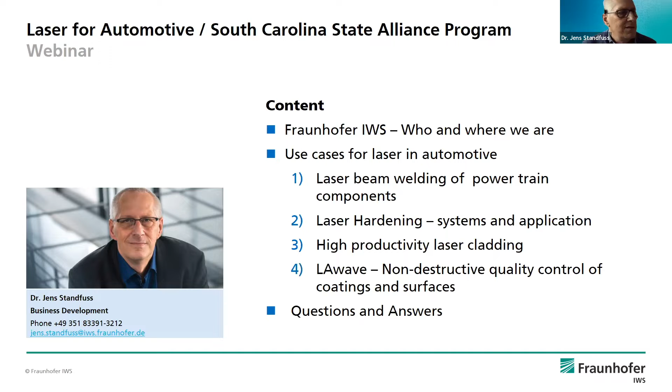I think you are familiar with Fraunhofer from the previous webinars. A short introduction to the Fraunhofer Institute for Material and Beam Technology: we are approximately 225 people of permanent staff, and we also have guest researchers, especially PhD students.

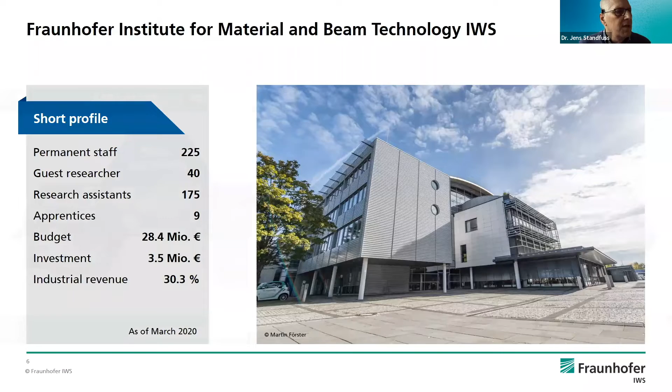We have a budget of around 30 million, and industrial revenue, especially last year, which was a very hard year, I think, for everybody working in industrial research, dropped a little to 30%. Normally we are in the range of 40%. Industrial revenue means direct contract research with companies from Germany, but also from Europe or from the US.

We are working with laser technology in two main topics. One is laser materials processing, from cutting, ablation, microtechnology, joining, and I will give some examples, and thermal surface technology, from hardening to coating technology. But we also use lasers for hot topics like additive manufacturing and printing, and also for chemical surface technology and PVD, which I don't want to touch here.

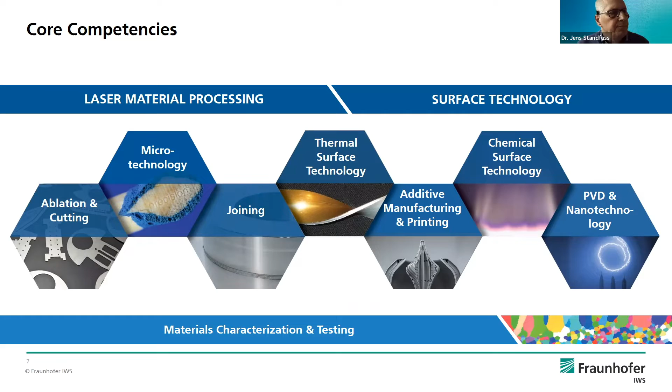From our history, we come with a very deep understanding of material behavior. This is our background, and we connect it with processing technology from laser materials processing. I think we are well connected in Europe and also in the US. In Germany, there are two centers: nearby here in Zwickau, at the university, there's a Center for Optical Metrology and Surface Technologies. And for many years, especially in coating technology, we have had a center in Dortmund together with the steel producer ThyssenKrupp Steel, working on PVD and ceramic coating technology, especially for steels.

In the east, we have a connection to Wrocław, Poland, where we have a project center too. But the oldest one, I think, is in the US: one is in Plymouth, the Center for Laser Applications, CLA, and also, I see Thomas here, a member at the CCD in Lansing. Since the beginning in the 1990s, there has been a connection to these centers, where we have a very good connection and history with the people and the technologies.

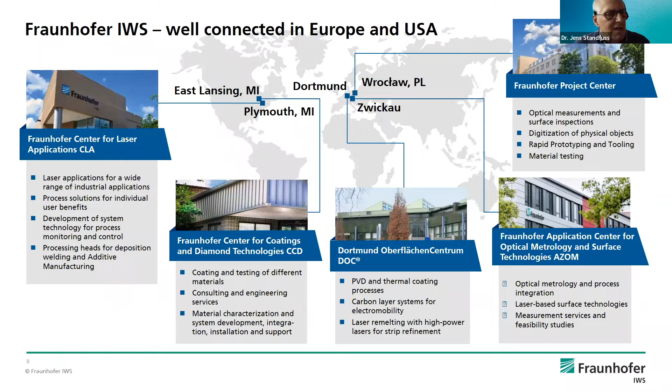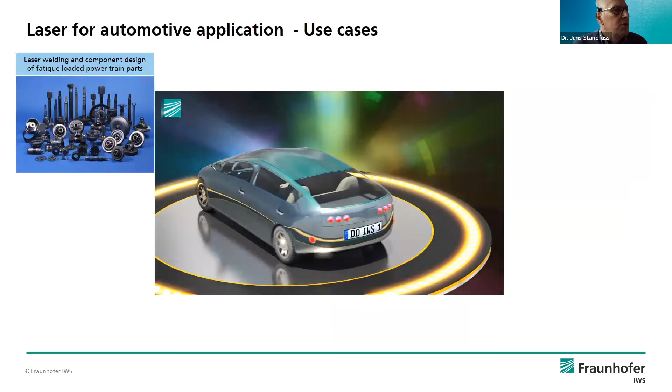What are the use cases I want to present and talk about with you? One is a very old story: laser welding, especially for high fatigue loaded powertrain. The second one is using lasers for hardening in mass production. I will give you some information on the process, the systems and possible applications. The other part of the surface topic is laser cladding, with an example for brake discs, like I told you in the beginning, especially for electromobility, where some new requests are coming from.

And last but not least, connected to this, if I coat something, I must also have a tool to characterize the coatings and the surface. I will give you some information showing our developments and systems for laser acoustic surface testing. That should be the storyline for the next 20 minutes, and hopefully I can give you some interesting information about our developments.

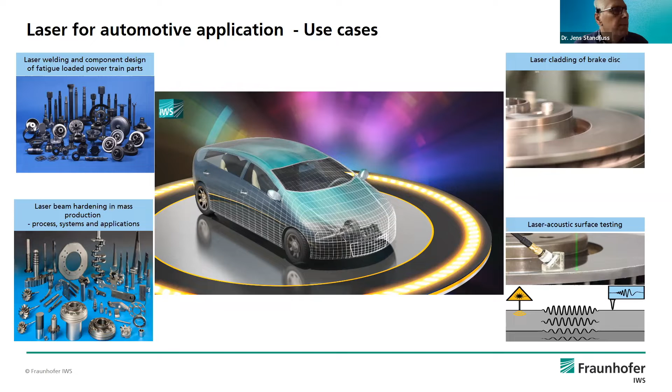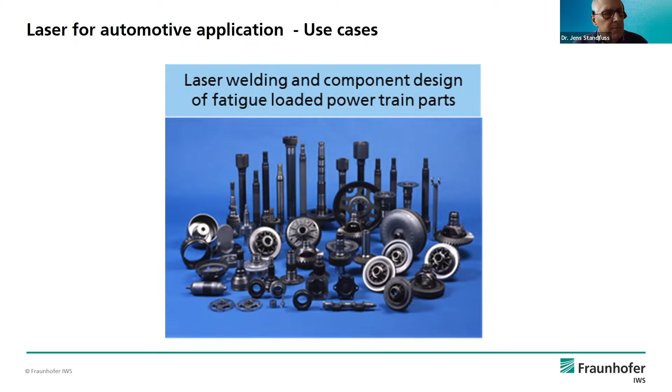First topic: laser welding and component design for high fatigue loaded parts, especially in the automotive drivetrain. What is the challenge? I think the market situation for powertrain components in recent years has been very hard. There is a rising number of drivetrain components. We speak about transmissions with 7, 8 or 10 speeds, very complex parts. But we now also have electromobility with its components, hybrid drives, and differentials and axles.

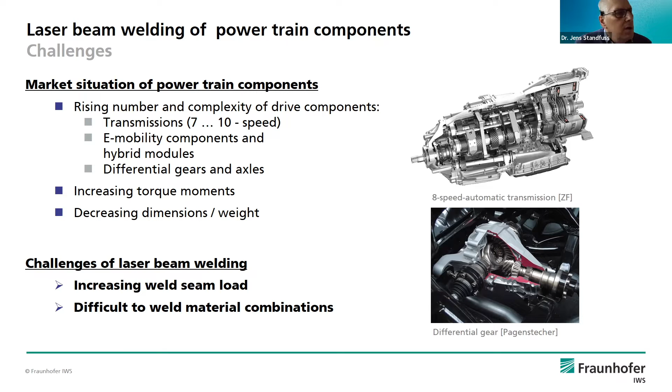What is common to all of these applications is increasing performance, especially with the development of high power motors and electromobility. Lightweighting means decreasing dimensions and weight, and one solution to this problem is laser welding. But we have some challenges: with higher torque, we have increasing weld seam loads, and we need high-strength materials, which are more difficult to weld. In the next minutes, I will give you some information on how we try to solve this problem, our procedure, and what we can offer you.

I will make an example to show and explain this in more detail. For example, for differential welding, I think this part we need for all kinds of cars, whether we speak about normal combustion engines or electromobility. All of this will have a differential here.

In the past it's not welded, it's fixed by screws, and we need a very long thick flange. We need these holes and rings for the screws, and we have 8 to 16 screws to fix the housing with the crown wheel. Since many years, laser welding comes more and more into this because it's faster and we can save weight. We don't need the flange, we don't need the screws, and this saves money and weight. This is the driving force to speak about laser welding for differential gears.

But there is a challenge from the material side. We have a crown wheel case-hardened steel and the cast iron housing. From the weldability, we have some challenges with the high carbon content of both materials, so we have extremely high hardening inside the seam, and we have a risk for cold cracks. So we must have some technology proven with respect to the material and the parts themselves.

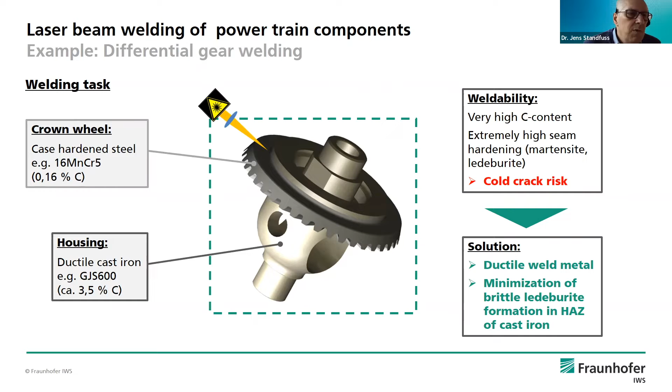And the solution as well is from the beginning, from the welding side: if we have hard-to-weld materials and high strength materials, if the weld is ductile, we have a chance to weld it without cracks. It needs, in more detail, to minimize the so-called brittle ledeburite formation in the heat affected zone of the cast iron, and so we get perfect welds with this.

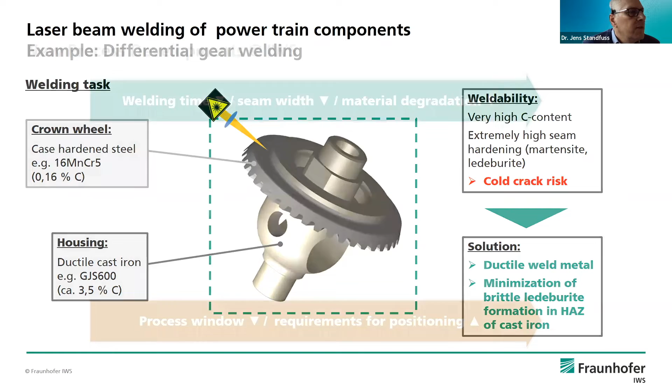But anyway, requests are sent. Welding machines are flexible, and you can use them for different types of parts. So anyway, the question from the customer is to reduce welding time, reduce the weld seam size with respect to this portion, reduce the material degradation to have a high performance part, and have a good process window. But all these requirements above are a little bit counterproductive to the process window and the requirement, especially precision. What is the history?

The history: we started this development more than 20 years ago using classical CO2 laser and filler wire, and started production here for a German company, ZF. I think they are also in the US. This first application, where we are talking and where we have these slides, is a differential from Mercedes-Benz for the M-Class, produced in Tuscaloosa, and this was the first application of this, starting with CO2 laser and filler wire.

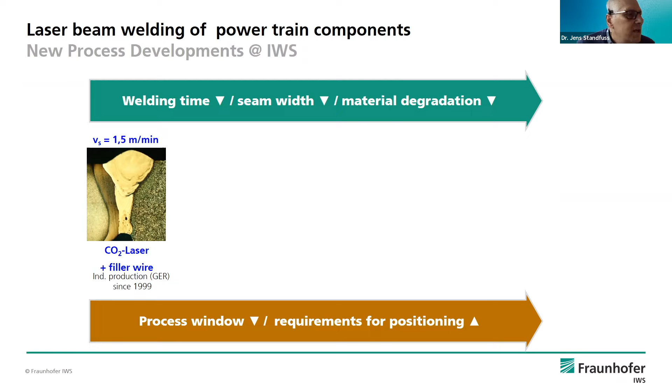Filler wire means a nickel-based filler wire, and it's very tricky to have a deep weld seam and a homogeneous distribution of the filler material. So there was some development to use a foil instead, which has the advantage that you can increase the welding speed, so the processing time drops down.

But this was the question from the customers: why do we need this filler wire? When we speak about nickel, we have a price of nickel around 80 to 120 euros per kilogram for this filler material. This means per weld, per part, we speak about 30 to 40 euro cents only for filler material. And if we have some hundred or thousand parts, then it's a high amount of cost for filler wire, so we want to speed up the welding speed to reduce the processing time.

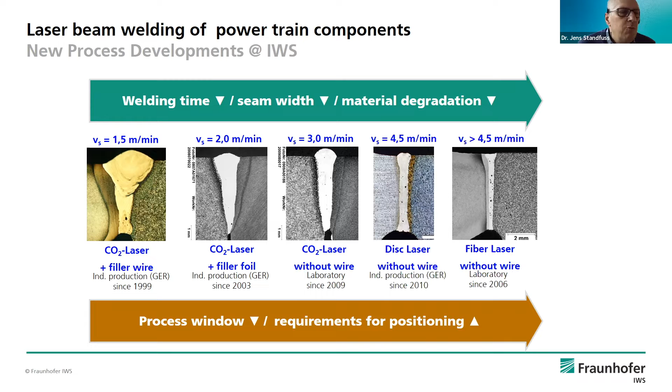That's why with new lasers we have this chance, and we can speed up the welding speed by a factor of 3 with this. But the welding speed is one side. You have some requests to the product quality and how you can handle this.

Our procedure is that we get a closed loop solution. Not only the process, but we also give the design values to design the part and the weld, and you have both connected with the process. This means we can offer a special FEM solution to adjust the weld seam to the stress situation.

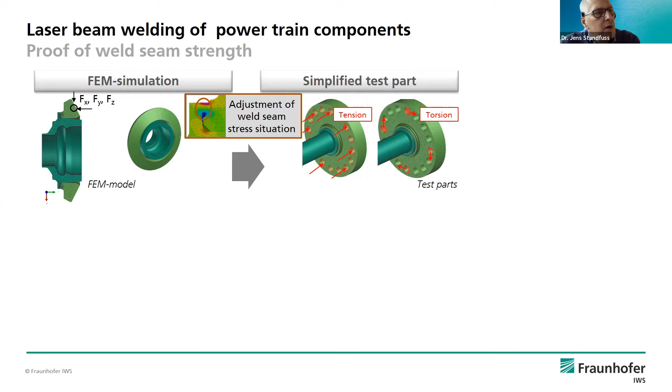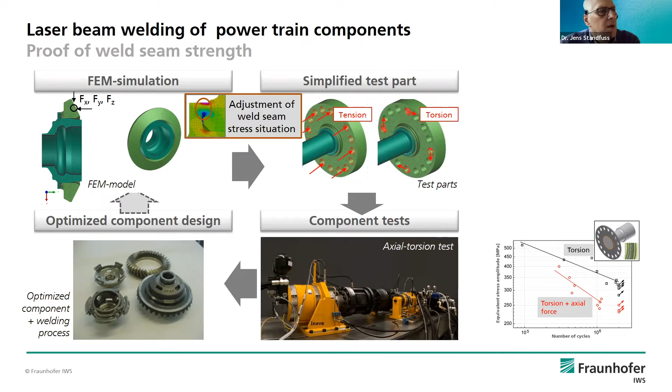But there are no dimensioning values for this special material combination, so you need tests to get design values for the weld seam themselves. It's a complex loading, you have tension, you have torsion, and we can do this by simplifying test parts, but with the request that we have the stress situation according to the real part. We can test this by axial and torsional loading and get S-N curves for the dimensioning, and then we can optimize the component design also with the knowledge of the process itself. And at the end of the day, what is the advantage?

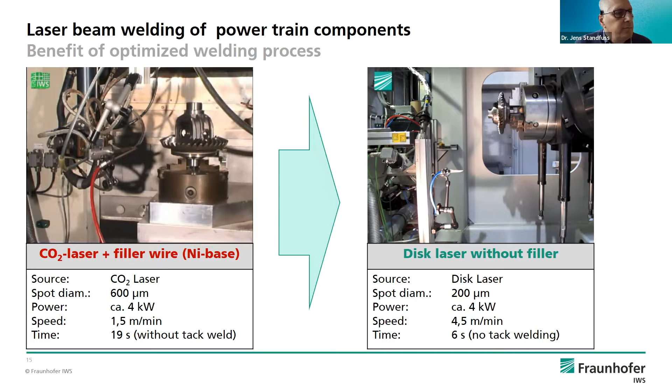Offering this means we have the complete process development, process chain, together with some customers or producers from equipment. At the end of the day, there's a collection of parts which come here to our labs, to our development center, for these powertrain components. We don't only weld some coupons for test parts, so we can offer you the complete process chain, beginning with some basic trials up to real components.

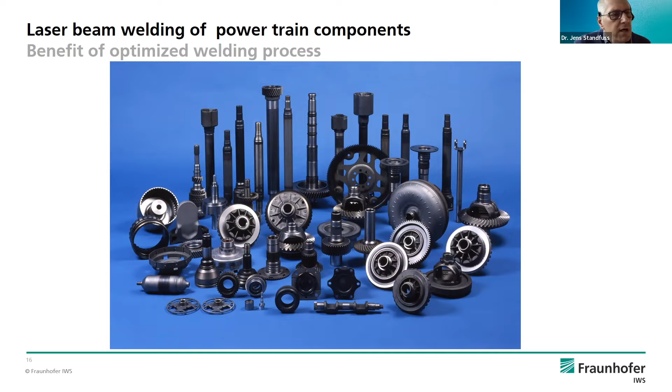This is the first application: laser beam hardening. What is the challenge generated for hardening? Conventional hardening technology using furnaces, induction, or flame hardening is time and energy consuming.

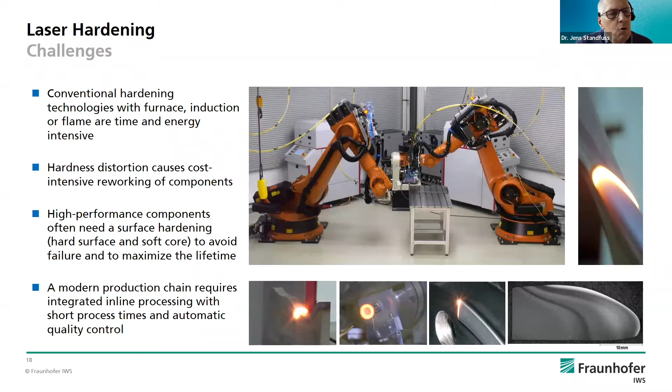The distortion is directly connected to the energy you put into the part. That's why laser hardening offers a good solution, because you can minimize the heat input and integrate it quite easily in existing process lines. It's quite fast, with short process time, and you can also get automatic quality control.

What it means - let me show some slides here. Hardening depth for laser hardening is normally up to 1.5 millimeters, and I think this hardening depth covers a wide range of applications for gears, stamping parts, tools, and so on.

The advantage compared, for instance, to induction hardening is that you need no liquid or gas as quenching media. You use self-quenching from the part, of course minimizing heat input only on the surface. So you get the maximum hardness - shown here for tool steels, up to maximum hardness over 800 Vickers hardness, approximately 62 to 63 Rockwell. You have a very efficient process because the absorption on the part is quite high.

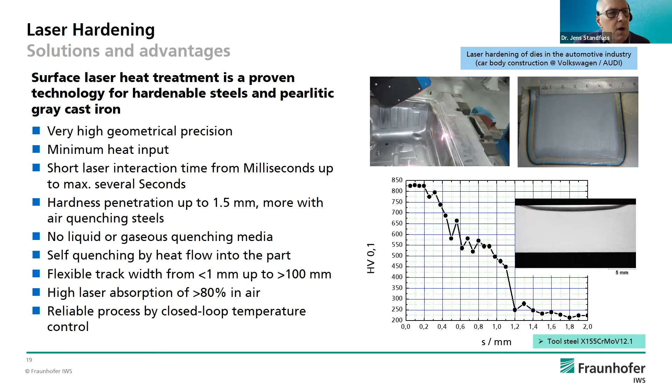It's a very good process, but what you need are systems to control this, to integrate, and to be flexible, using the flexibility of such a process. What you need is two things: a beam forming system to shape the laser beam and adapt it to the part, and you must control the temperature and heat input depending on the geometry and heat conduction of the part.

Both of these can be offered. There are developments of real-time measurement sensors to control the process parameters, and this is connected to a beam forming system to adapt the beam.

Shown here in the part, you see a quite wide range of geometry change, and the process runs automatically. You have up to a 60 millimeter wide track for hardening, adapting the process parameters by scanning laser power and also the scanner parameters automatically to the surface composition - without programming. You only program, based on some experience and values, the hardening depth to the material, and the geometry changes are controlled automatically.

This covers a very wide range of geometry, so it's a very flexible tool - the beam forming unit along with the temperature control system - to harden complex shapes. This is very flexible.

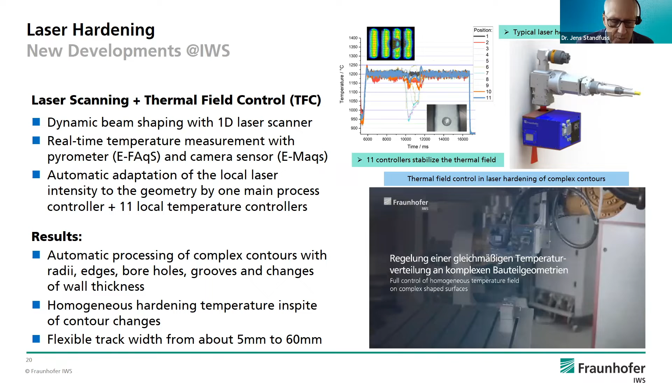Some examples: turbocharger shafts as a running example because there are different kinds of shafts in different diameters. We substitute classical induction hardening because for each geometry you'd need a coil and a tool, whereas with laser it's just software connecting to the part, and you can save money. Rails, bearings, balls - there are different kinds of applications for laser hardening.

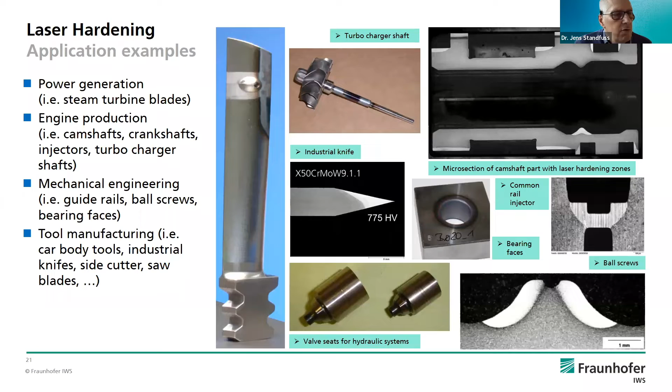To summarize, what is the benefit? You have a very efficient surface hardening technology. You can minimize the energy consumption, and with this minimize the heat input, so you get parts with very high hardness and low distortion. So reworking is in many cases not an issue.

Secondly, it's very easy to integrate into existing machines or production. Tools like laser beam shaping and temperature control are needed for this, and this can be offered, and it's quite proven for different applications, as shown here in this picture.

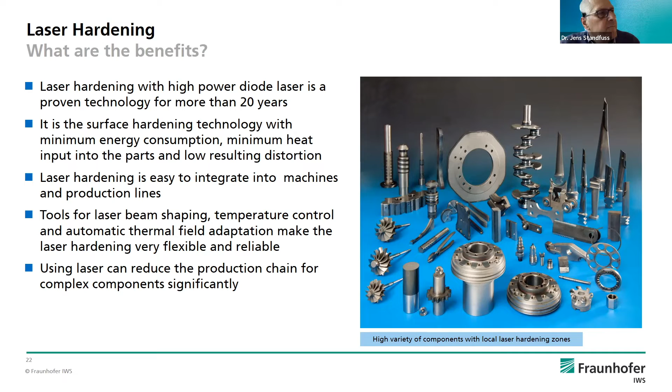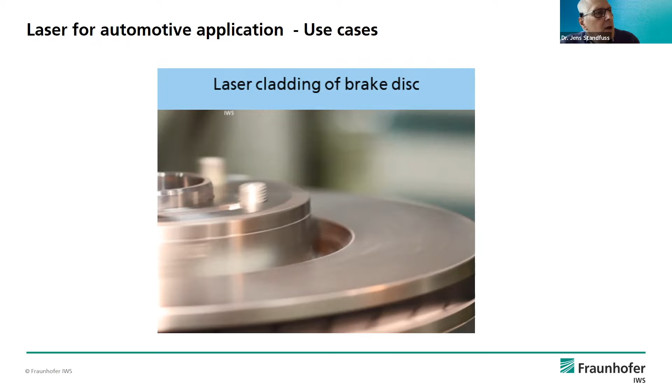That's why you need some cladding technology to do this. Laser is one possibility, but why laser? What is the benchmark for other processes? Thermal spraying is one side.

You can have a coating thickness very thin. You can do this for a large surface. You have a very low heat input, but the coating structure is quite heterogeneous, and the adhesion of the coating to the substrate is quite low.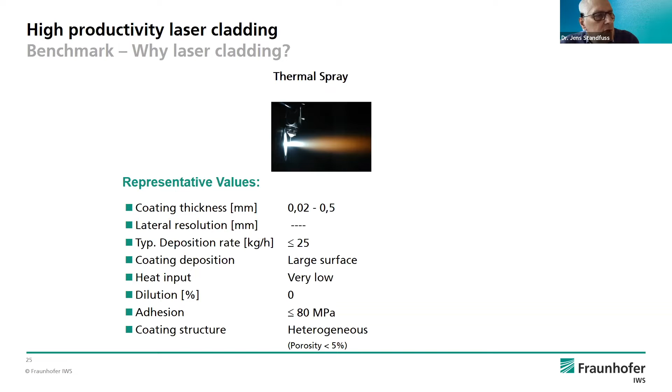Plasma transferred arc is another one. This is also done trackwise. Different coating thicknesses are possible, but the heat input is quite high, and the dilution of the base material is up to 18%.

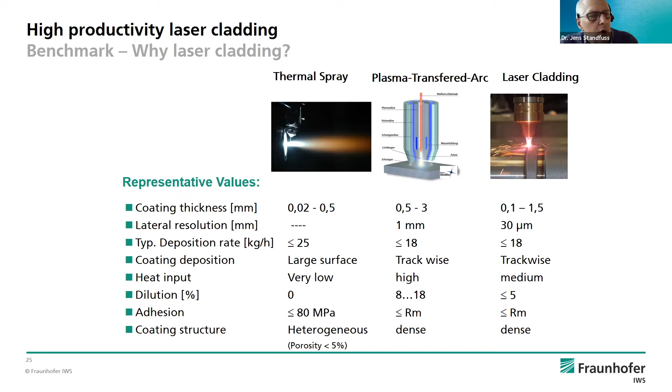If you compare this to laser cladding, you have a very high resolution. This can be good, but you can also use, as shown in the next slide, a very high efficiency through very wide tracks. The advantage is the heat input is low, and especially the dilution of the base material, which leads to a change of the composition of the cladding layer, can be prevented. So you have a very high quality clad.

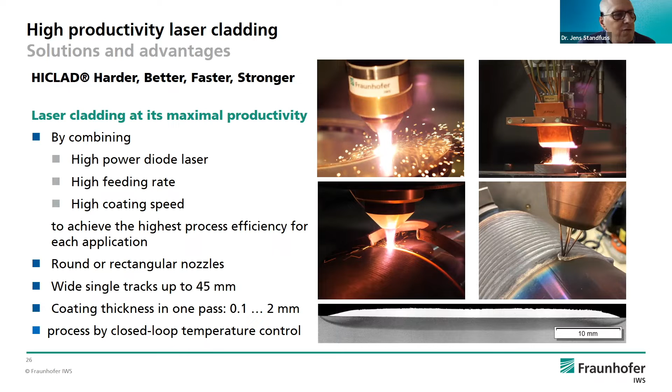To push the productivity, we are now able to use this with high power diode lasers. There is a very good development on the laser side, especially for high power diode lasers. So there's increasing power available for less money, and it's not normal that you get more for less money. This is a very good thing.

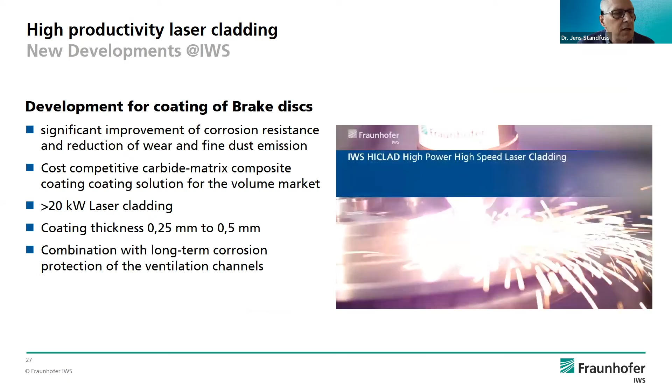How it works: you see this HICLAD process with a high dynamic beam at high speed, using laser power up to 20 kilowatts, and you get very high productivity with this process. The coating thickness is around 0.25 to 0.5 millimeters, with a good combination of long-term corrosion protection.

With these coatings, you can cover the risks or improvements which are needed, coming from the corrosion resistance where you need improvement, and the reduction of wear, especially the reduction of fine dust emissions with respect to environmental requests, which are getting harder and harder for the automotive industry.

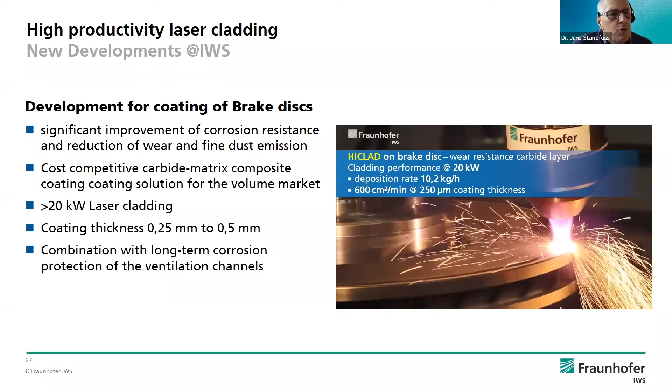And at the end of the day, a tailor-made solution, without carbides or with, you can adapt the composition of the cladding layer to the requests from the part.

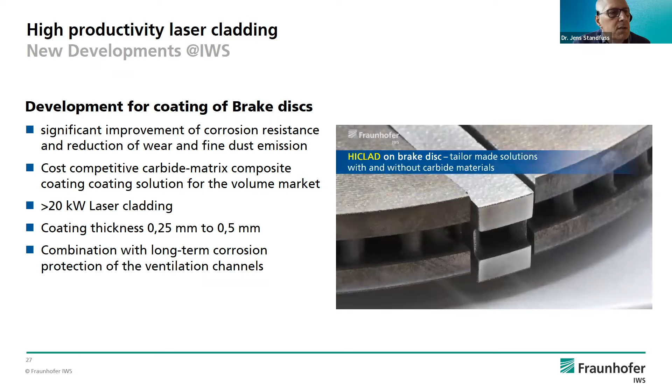Let's speak about costs and laser power. With the availability of high power lasers up to 40 kilowatts, you can adapt by selecting the laser your efficiency. Efficiency means achievable productivity in square meters per time per year. So there are some values to calculate this and to give you some input.

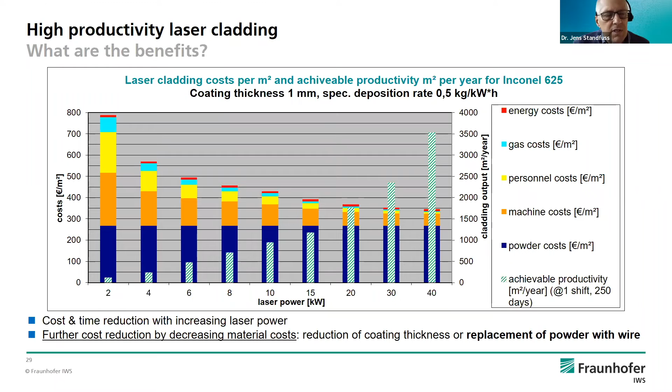What is the right process? What is the right laser power? And what can you expect with respect to machine costs, powder costs, and energy costs? So you can adapt your process to your requests in a wide range.

If you have some coatings, there are some requests to characterize the quality of the coating and also the quality of the interface. One method is the so-called laser acoustic surface testing.

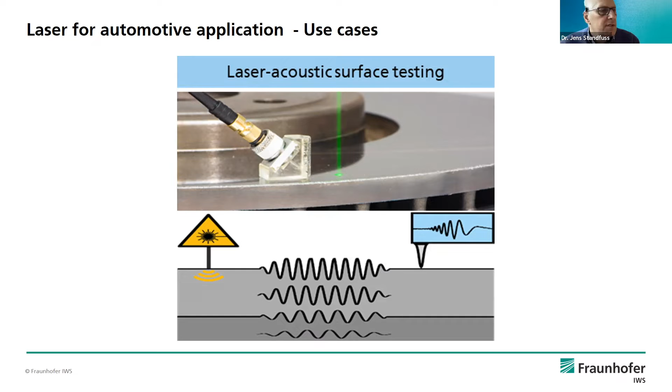Let's take a step backwards: what is the challenge in general when measuring or determining the mechanical properties of coated components with non-destructive technologies, which are in a wide range necessary? This applies for pistons, for cylinder liners, for electrical heaters like thermal spray coatings, as shown before, brake disc coating for laser cladding, but also for many other parts.

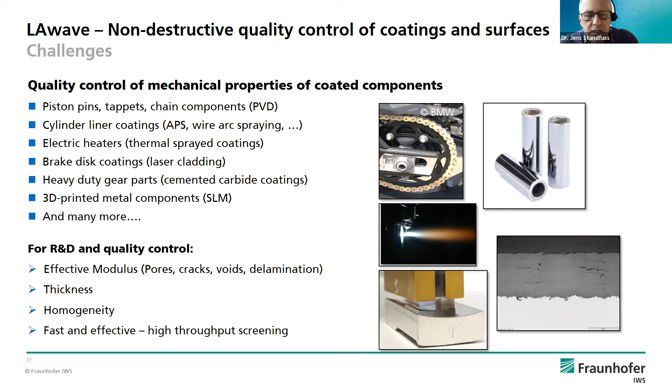The master control is the quality of the cladding layer, with respect to pores, cracks, and also delaminations, characterizing the thickness, the homogeneity, and this should be fast and effective with a high throughput.

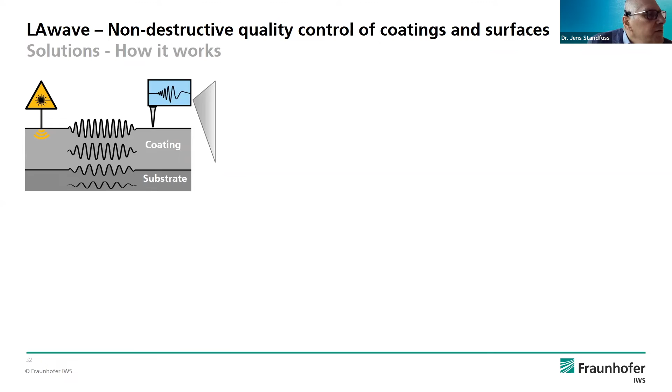One principle of how it works is the development of the so-called non-destructive quality control for coatings and surfaces, using wave-based methods. How it works, and what it has to do with the laser.

First, you get an acoustic wave from a short laser pulse, which sends a mechanical wave through the part and is transmitted through the coating and through the substrate as well.

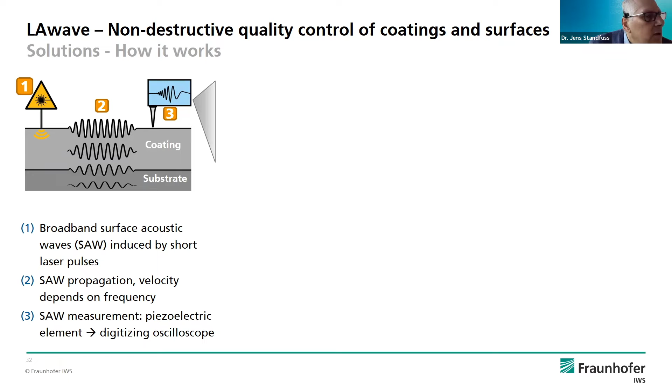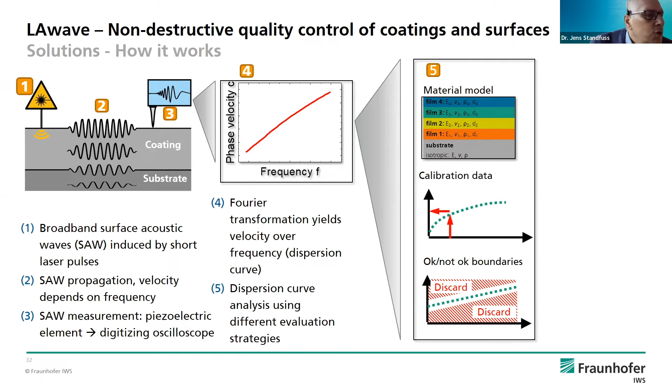You measure the propagation, the velocity, and also the frequency of this surface acoustic wave. And this is a piezoelectric element and the necessary equipment to store the data. And then you see from the values, especially from the propagation values, from the phase velocity over the frequency, so-called dispersion curves. And based on these dispersion curves, you get different values with respect to the coating technology.

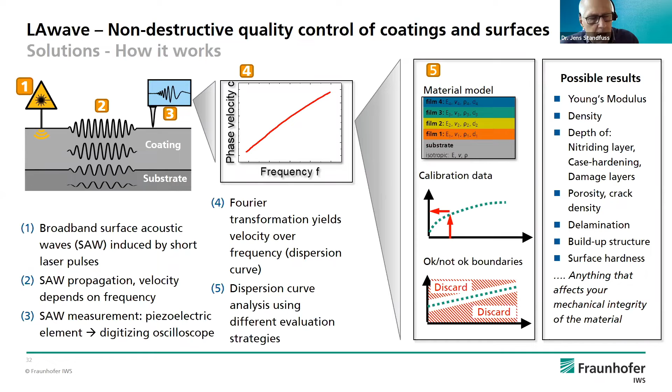And at the end of the day, you can measure and determine non-destructively the Young's modulus, for instance, of the layer. So you get some information on the density, on the depth of the layer, and also of the hardening, for instance, and also if there are some damages inside, porosity, cracks, delaminations. And that's our offer: you have a very wide range of information about the quality of the layer and of the interface. And this works non-destructively.

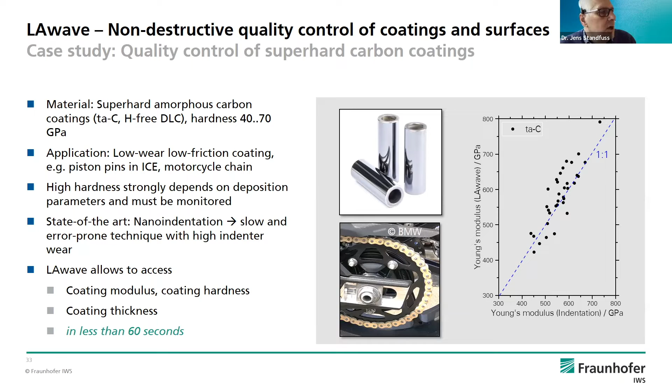Like shown here, for some laser arc coating for chains used by BMW. The coating is done for chains to reduce the wear and also to lower the friction resistance, and you get an effect of about 10%, something like this. And this is transferable to different things. What you don't need at least is state-of-the-art destructive testing and characterization. And at the end of the day, you get some very interesting things, and this in a very short time.

At the end of the day, we can offer a complete system adapted to the requests of the customers. So it means mechanical properties you can characterize non-destructively. We are quite fast. It's adaptable to different applications, and you can get a customized system. And the advantages over state-of-the-art systems like nanoindentation is you have a faster measurement, no calibrations, less consumables, and you get more information with a higher precision.

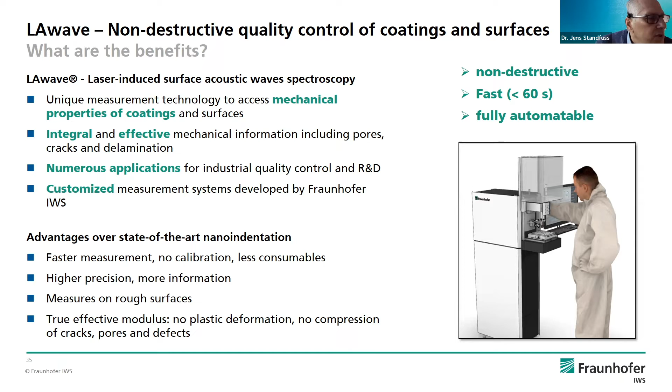And I think with the process development, shown again for the laser cladding, in combination with such a system, you have a complete solution for cladding and also for the characterization of the process quality and the quality of the part themselves. This should be a short story about the possibilities of lasers.